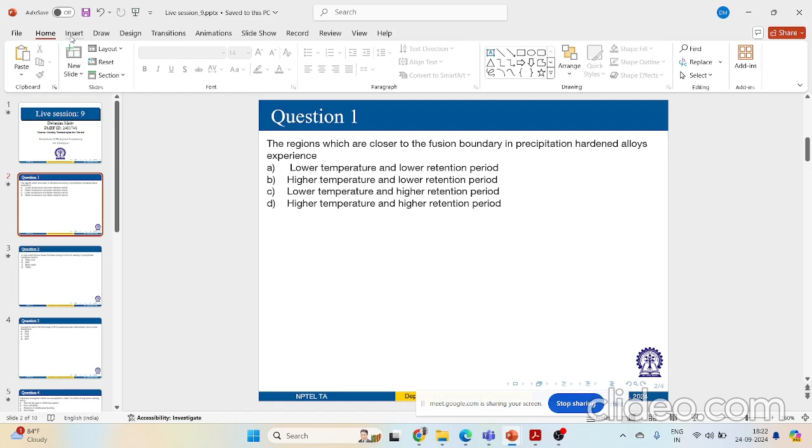As I was saying, metals can be strengthened in several ways, such as solution hardening, work hardening, precipitation hardening, and transformation hardening. Now, the effectiveness of these hardening mechanisms can be significantly reduced with heating during welding in the heat affected zone. My tablet is not working today, so we will use presentation mode only for whatever I write down.

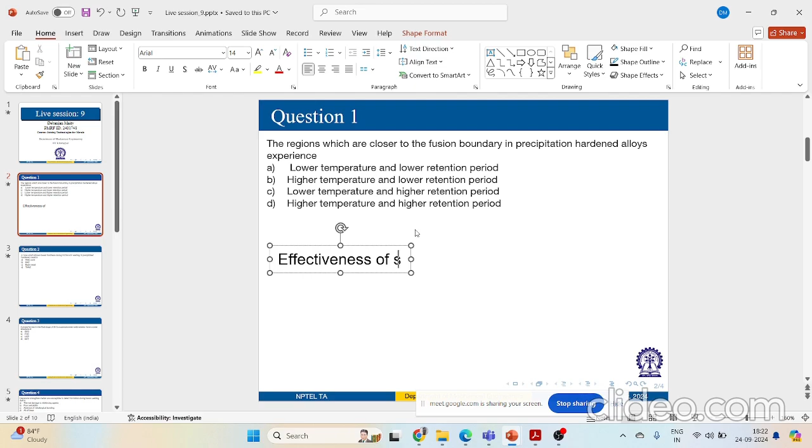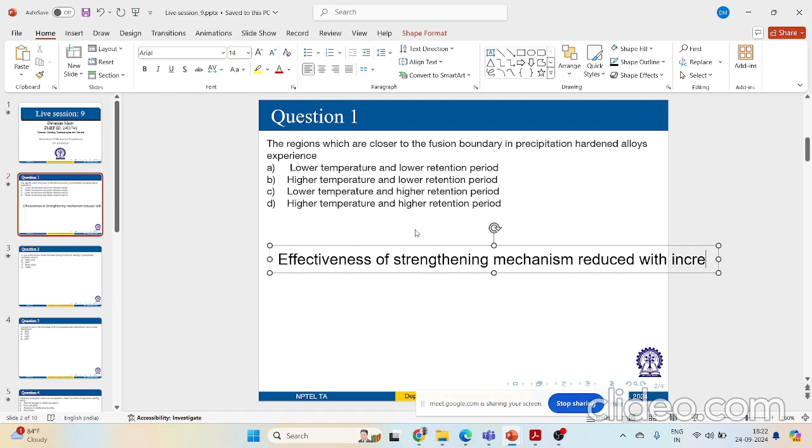So what I was saying is the effectiveness of strengthening mechanisms reduces with increase in temperature. That is a very well known thing.

Now the peak temperature in the heat affected zone is too low to cause melting. You cannot observe melting in the heat affected zone, since the heat affected zone is the zone beside the fusion zone.

However, the temperature is high enough to cause change in the microstructure as well as the property of the material. So if you see, when a metal is cold worked without any thermal effect, and is plastically deformed—for instance, by cold rolling or extrusion—what happens in terms of metallurgical aspects?

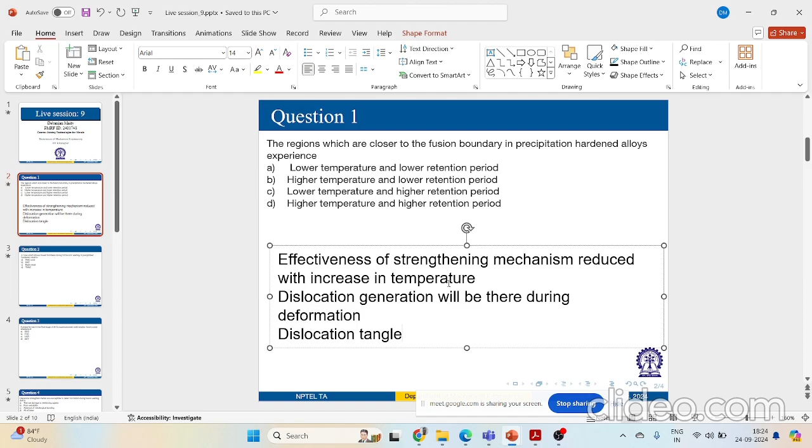There will be dislocation generation during any kind of deformation process. Now these dislocations can interact with each other, and if they interact, they form some kind of tangle—we call it dislocation tangle. Such dislocation tangles hinder the movement of newly generated dislocations.

In this way, the metal is strengthened or hardened by cold work. There will be lots of dislocations, they interact with each other, and due to this interaction they hinder the movement of newly generated dislocations, hardening the metal. This is called work hardening.

Now most of the energy expended in work hardening appears in the form of heat only. However, if you look at the microstructure, a finite fraction of energy is stored in the material as strain energy. This stored strain energy is the driving force for recrystallization.

Whenever recrystallization occurs, this stored energy is released. So the strain energy that gets stored is only released during the process called recrystallization, and this energy is released as fresh and strain-free grains. So recrystallization is when strain-free grains form.

Now, this work hardened metal, I was telling that the strength of a work hardened metal tends to decrease with increase in annealing temperature and time. As simple as that.

Now, there is another procedure called recovery. So before recrystallization, some kind of process takes place, which I'm calling recovery. During that period of time, certain properties of work hardened material, for instance electrical resistivity, will tend to recover without causing any microstructural change. So you will not see any kind of change in your microstructure before recrystallization happens.

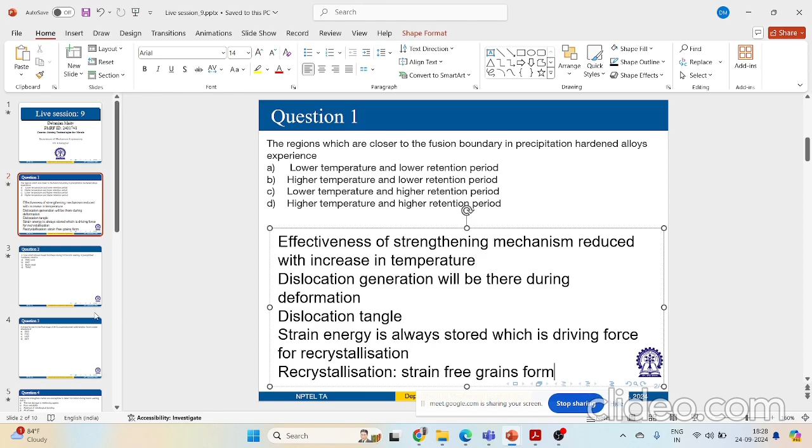And this is called recovery. So, surface energy. How does grain growth occur? So you will have your total grain boundary area, and there will be some surface energy, total surface energy associated with your system, right?

Now, the surface energy will reduce if your grain size is getting increased. So with coarsening of grains, my surface energy will be getting reduced, right?

So it is something like this. Let's say this is my x-axis, duration of annealing, the annealing time. And this is annealing temperature on the y-axis.

Now, if you are increasing your temperature as well as time, you will be increasing your grain size, right? So something like this, I am increasing my grain size towards this direction. As I go upward, this is my grain size D1, this is grain size D2, the grain diameter I'm talking about, this is grain diameter D3 and D4, and so on.

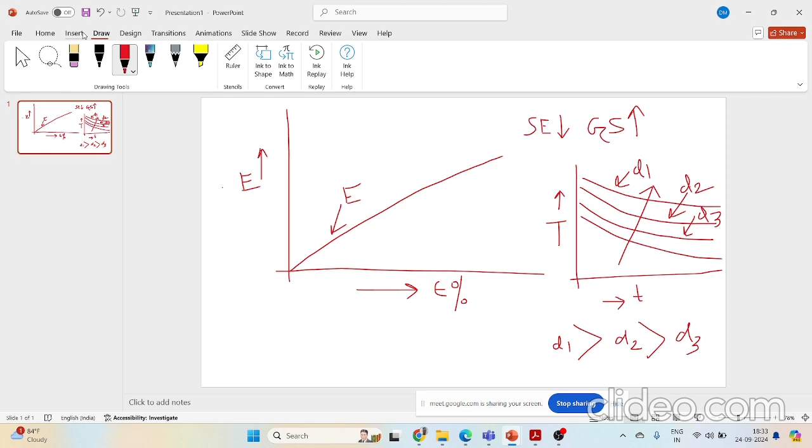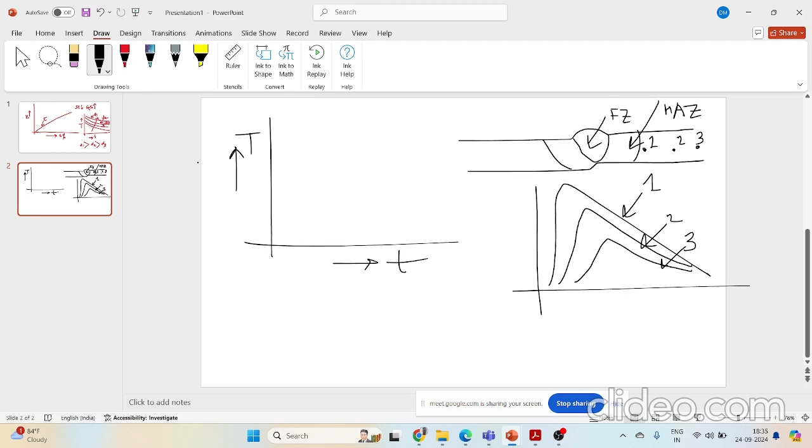Now if you see, is there an eraser? This is the eraser. So this is my time and temperature plot. Now if you see the strength or hardness of a metal in these three different regions, how will it vary?

So this is my distance from the weld center, okay, and this is my sigma, denoting strength or hardness. So the loss of strength will be highest for location 1, which is experiencing the maximum temperature.

If you plot this variation in strength, this will be the lowest one at location 1, then location 2, and as I go towards the base metal zone, that will be the unaffected zone. So this is 2, and this will be my location 3, correct?

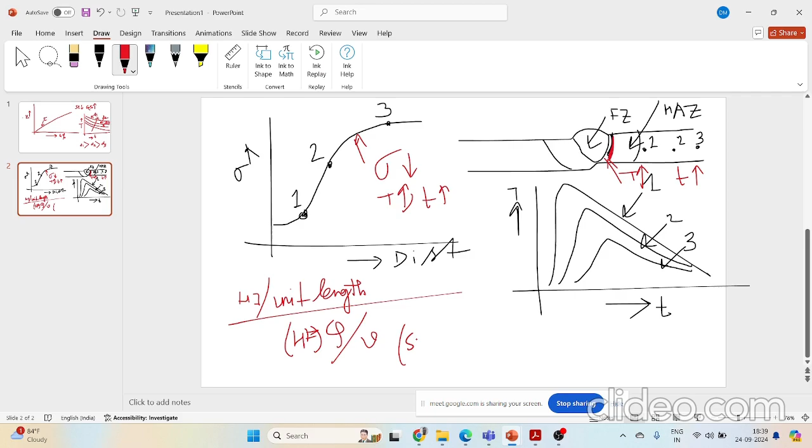Heat input per unit length, I'll denote this as Q by V. Q is my heat input, and this is my welding speed. The ratio of total heat input to the welding speed is known as heat input per unit length.

So as you increase your heat input per unit length, the size of the heat affected zone increases, and the retention time above the effective recrystallization temperature increases. Consequently, there will be loss of strength in your heat affected zone, and this effect becomes more severe as the heat input per unit length is increased.

Now if I want to plot this grain size, how will it vary? This is my distance on the x-axis, and let's say this is my grain diameter or grain size. Which location will experience the maximum grain size? The location which is experiencing more temperature and time above the recrystallization temperature. So my location 1 will experience the highest grain size compared to location 2 and location 3. As you approach the base metal region, you end up with a much finer, unaffected region. As you increase time and temperature, you enhance something called grain coarsening.

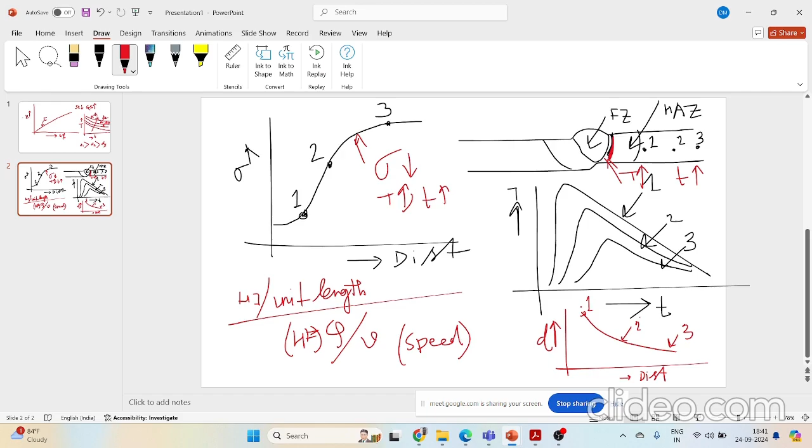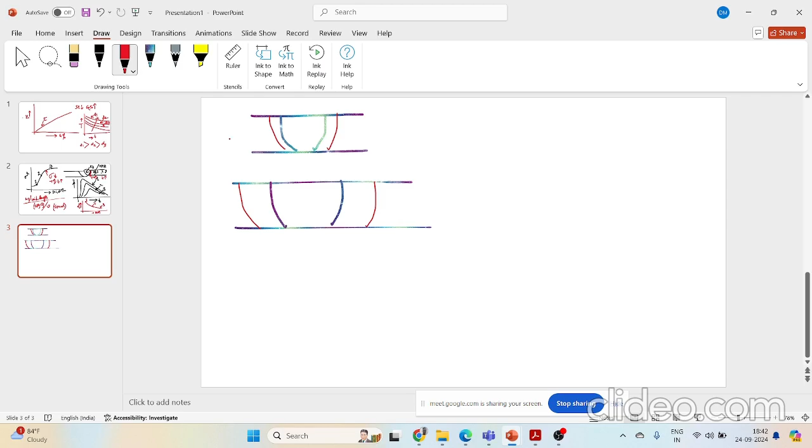I was talking about this heat input per unit length. Let's say this is my fusion zone and this is my heat affected zone, for one condition. For another condition, this is my fusion zone and this is my heat affected zone. For the next one, this is my fusion zone, this is my heat affected zone. And let's say this is the center line.

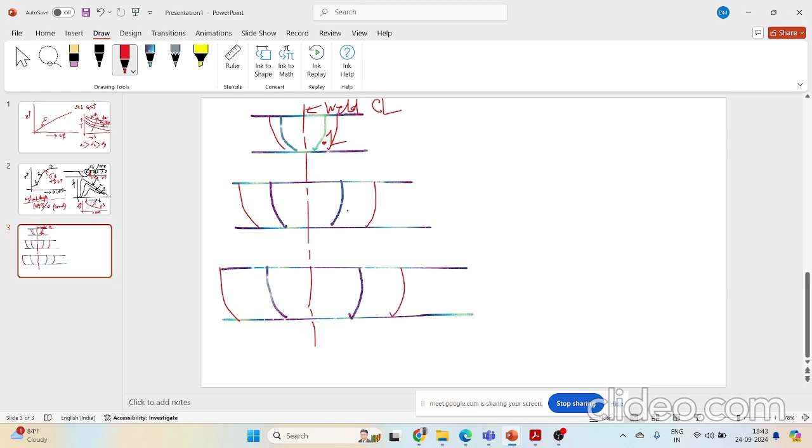This is my weld center line. Now this is location 1 in the heat affected zone, this is location 2, and this is location 3. As I am moving downwards, I am increasing my heat input per unit length, Q by V is getting increased. And as I was saying, as you increase your Q by V, the ratio of total heat input to the welding speed, the size of the heat affected zone will increase.

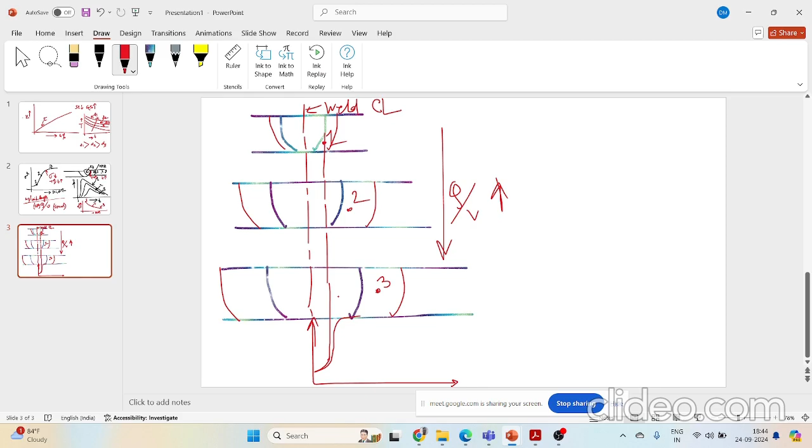So how will my strength vary then? Let's plot my strength at location 1, location 2, and location 3. This is location 1, this is for location 2, and this is for location 3. This is strength. This is what we are talking about. Any question?

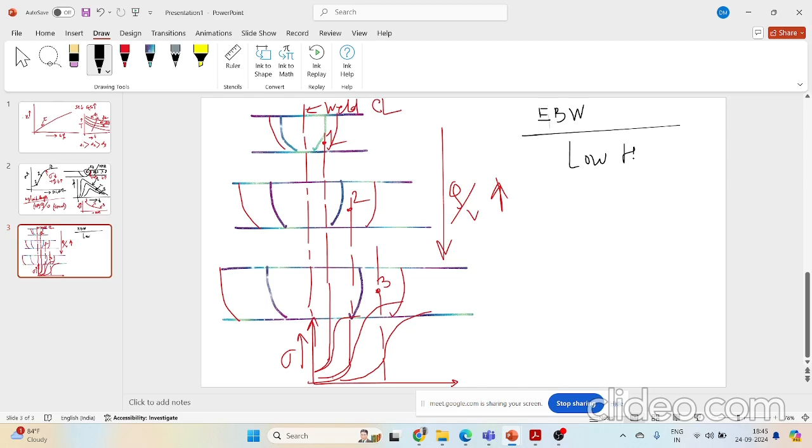Now, can you tell me, in electron beam welding, will you see more or less recrystallization? What happens in electron beam welding? It offers low heat input and a higher cooling rate. Cooling rate is very high in electron beam welding, so very little recrystallization is observed in the heat affected zone of your work hardened material.

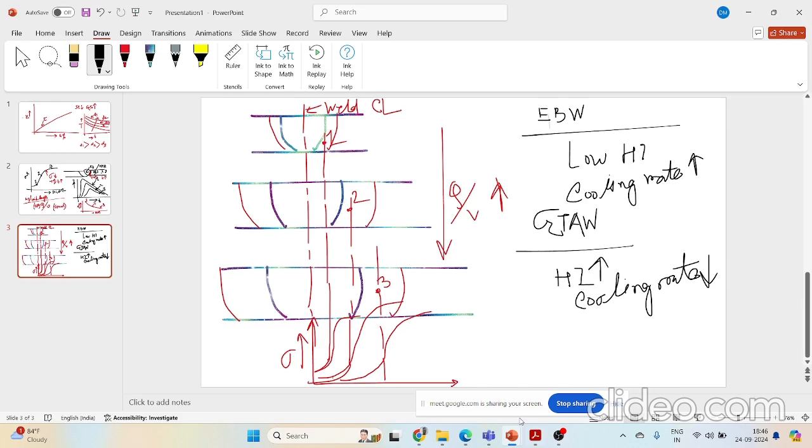On the other hand, consider gas tungsten arc welding. How can you characterize this process? There you will have higher heat input and lower cooling rate. Because of that, you get time for diffusion to happen. Recrystallization and even some grain growth will be observed in your heat affected zone. So I will come back to my original presentation. We have talked about this recrystallization, work hardening, and grain growth.

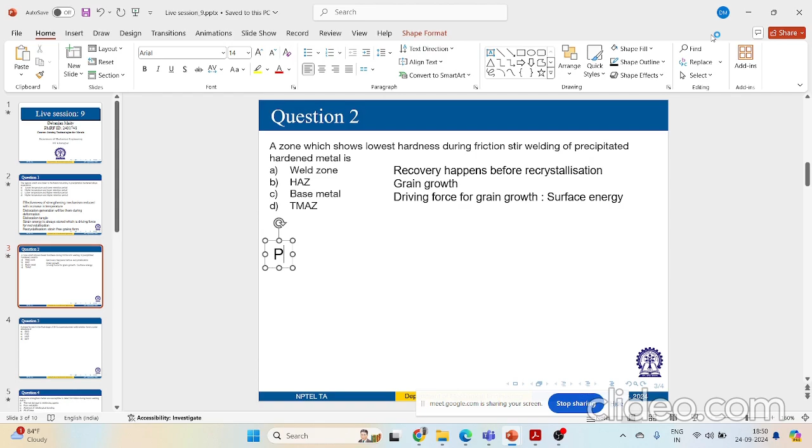So what we will do next, we'll talk about precipitation hardening. Okay, so we'll talk about precipitation hardening.

If you are thinking of precipitation hardened metals, aluminum alloys are the most frequently welded metals which can be strengthened by this precipitation hardening. In general, high strength aluminum alloys are more susceptible to hot cracking, and loss of strength or ductility in the heat affected zone.

Now, let us discuss a little on the background of precipitation hardening. We have probably talked about the mechanism of precipitation hardening before - how does it work? Let us talk about it again. So, aluminum and copper alloy, Al-Cu alloy, Al2Cu. Sorry, my recording got interrupted in between, but fine.

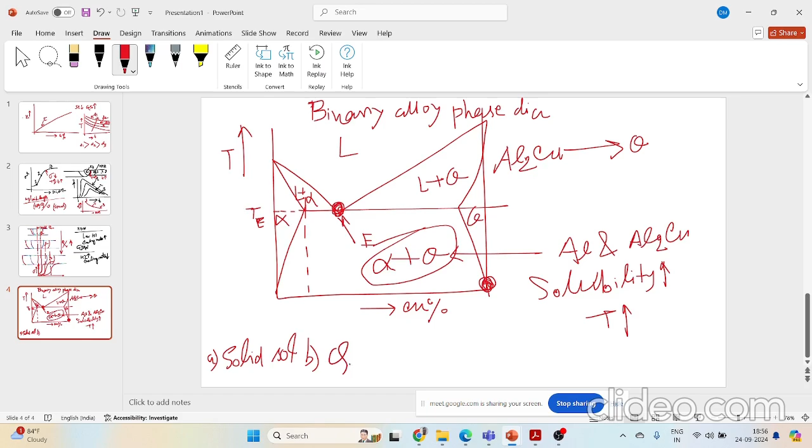After that I will do quenching. Once I have formed this solid solution, I will do quenching to rapidly cool the solid solution to room temperature. When I do this quenching operation, this rapid cooling, what will it do? It will supersaturate the solution - my solution will be supersaturated in copper, so the concentration of copper will be much higher than it should be.

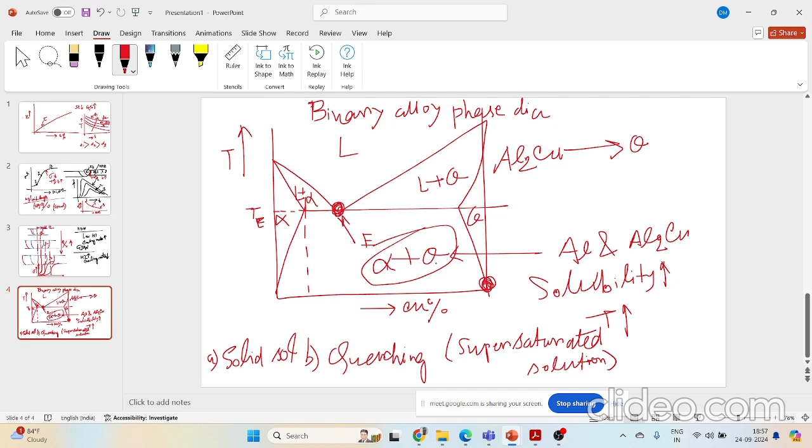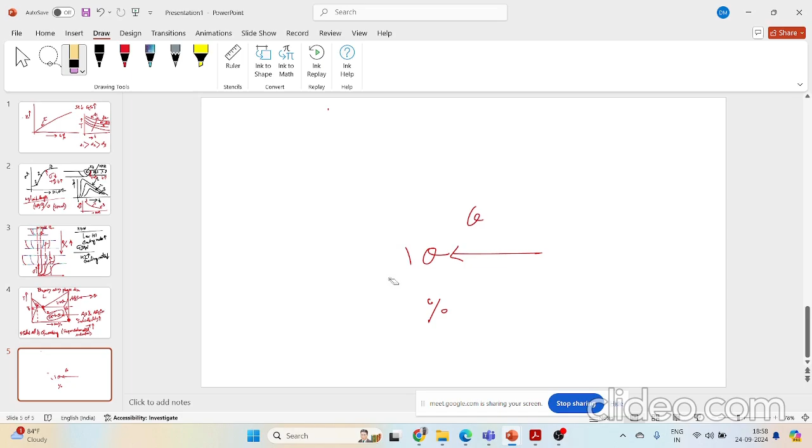So this will form a supersaturated solution. Meaning... for some reason this recording is not working properly. Okay. So I have made this supersaturated solution. What will my next step be? My next step will be the aging process.

I'll be doing aging by heating at some intermediary temperature, let's say 190 degrees, which is called artificial aging. If you're not heating the alloy material, then it is called natural aging. So there are two different aging heat treatments: one is natural aging, one is artificial aging.

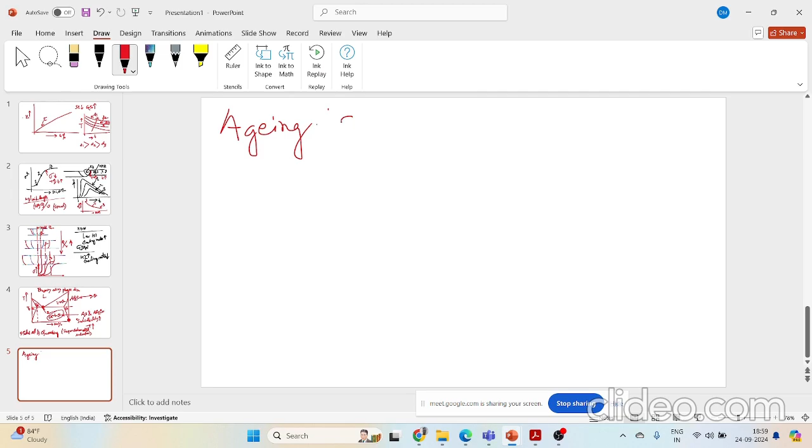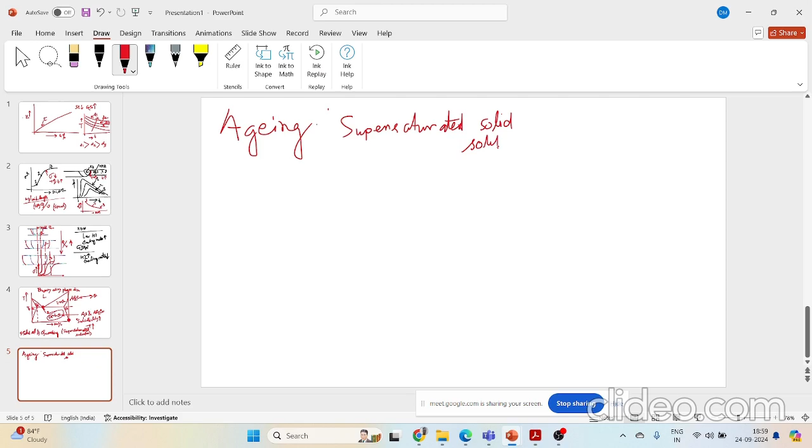There will be five sequential structures identified during this artificial aging of aluminum-copper. What are those? Initially I will be starting with the supersaturated solid solution, and then I will be forming the GP zone. After that, there will be formation of theta double-dash, then theta dash, then the theta phase.

What are these? So theta is the equilibrium phase. What kind of structure does it have? This Al2Cu phase has a BCT structure - body centered tetragonal. Remember that.

Now, the GP zones are sometimes called GP1 also. The theta double-dash phase is sometimes called GP2, and the theta dash phase - these three.

These three phases, they are metastable phases. They are not the phases that will form in equilibrium condition.

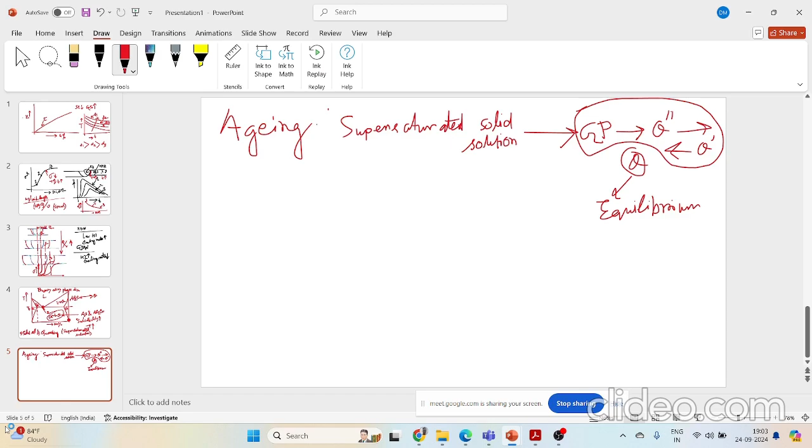This is my aging time, the unit of which can be in days. And this is, let's say, HV. What is HV? HV is Vickers hardness number. Correct?

Now, whatever I will be plotting has been found out from experimental observation. I'll be plotting two different temperatures of aging, one at 190, one at 130. There will be a difference observed in the hardness value for this GP region, theta double dash, theta regions, right?

So one is this, which had been aged at 190 degrees, where somewhere around an aging time of 10 days, formation of theta dash was there, and towards the end I'll be forming this equilibrium phase.

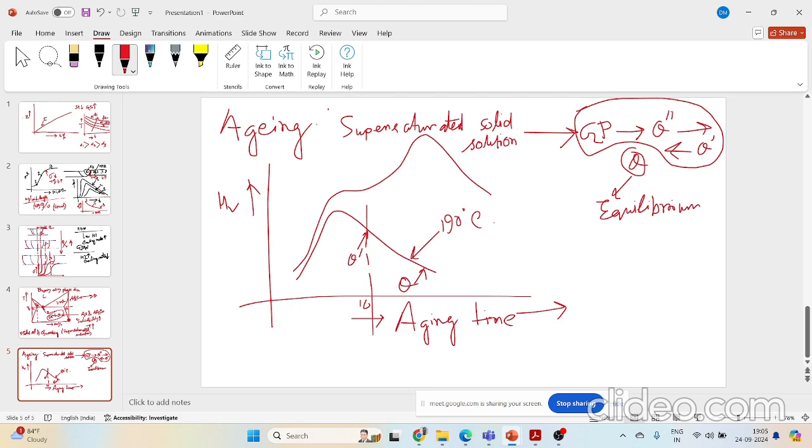And another temperature region is lower than this, done at 130 degrees, so that will observe characteristics like this. This is my GP1 region, and over here this is my GP2 region. Subsequently, it will be forming the equilibrium phase. Correct? Any question?

I will show you another graph. What I will show there is the precipitation hardening curves of this aluminum alloy. This again has been experimentally observed. The alloy was naturally aged at room temperature before heat treating.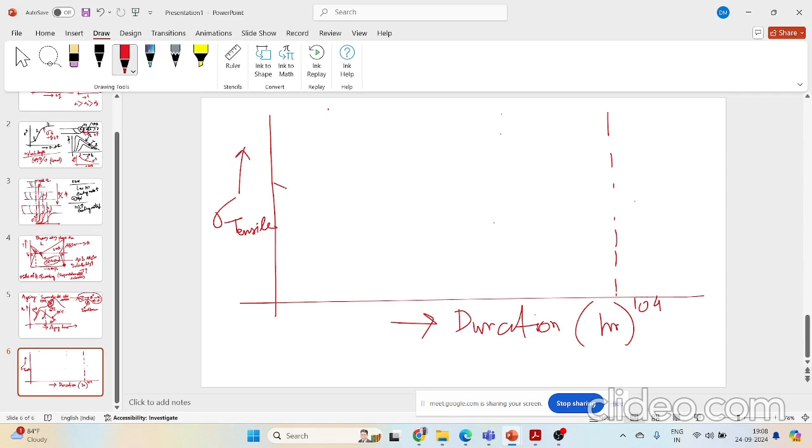So with increase in duration, the lowest one will be at highest temperature. This was aged at 260 degrees C.

And as you will be decreasing your temperature, it will be varying something like this. This was somewhere around 230. This was somewhere around 205. This was somewhere around 170, and so on.

So what you will be seeing: the alloy had been naturally aged at room temperature before heat treatment, and the initial strength decreases due to dissolution of GP zones formed in natural aging. Higher the temperature, the faster overaging will occur and the strength decreases. So higher the temperature.

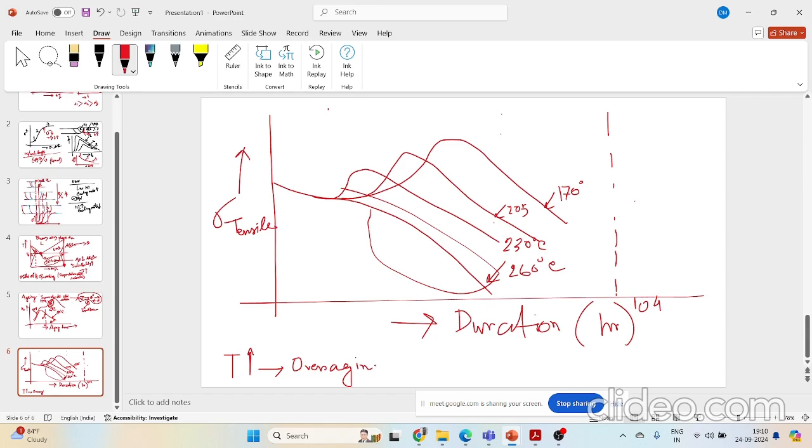Higher the temperature, faster will be overaging, and strength decreases.

Now, how will we characterize this heat affected zone of base metal that will be strengthened by precipitation hardening? How will we be characterizing that? To understand the heat affected zone characteristics of precipitation hardened metals, we need to be aware of the stability of those precipitates, which will be associated with the metal as a function of temperature. The stability of those precipitates is very important to understand the characteristics of the heat affected zone.

Now, the strengthening precipitates get destabilized or dissolved in the matrix above a certain critical temperature, depending upon the composition. Those will be dissolved with increase in temperature. There will be a certain temperature above which you will see no precipitation formed, so there will be this reversion or dissolution of those precipitates. Now, formation and dissolution of those precipitates always affect the hardness and strength of your metal during welding.

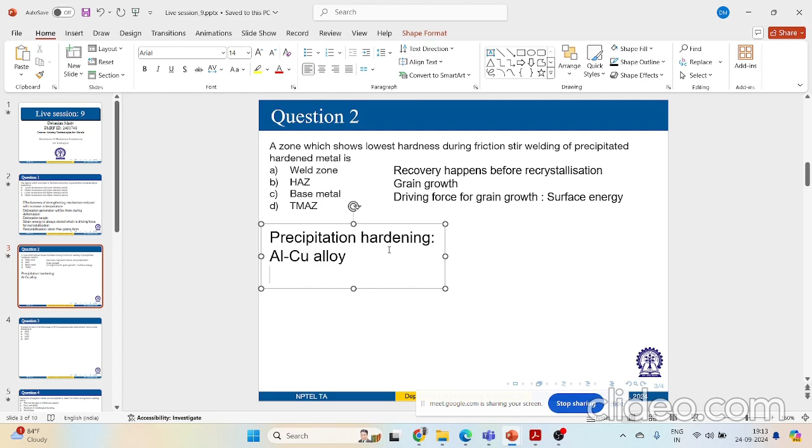So there are different precipitation strengthened base metals. If you see this aluminum series, there is this AA 2000 series, so we denote it something like this - aluminum 2000 series, aluminum 6000 series, aluminum 7000 series.

These are some of the precipitation hardened metals, and they can be developed either by fusion welding or solid state joining process, if you are raising the temperature of your base metal high enough.

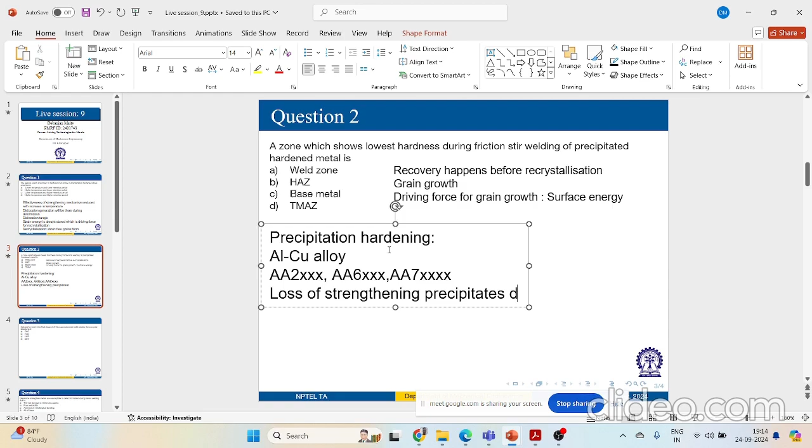Now, over here, the heat affected zone - the softening of your heat affected zone will occur due to two different processes. What are those? There will be loss of strengthening precipitates due to dissolution - this is one, I'll mention it as A. What is the other? The coarsening of grain precipitates.

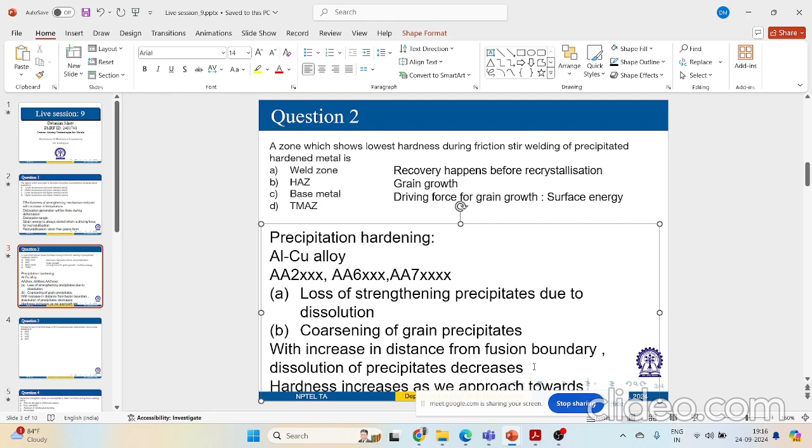With increase in distance from fusion boundary, what will happen? Dissolution of precipitate decreases, and hardness increases as we approach towards base metal.

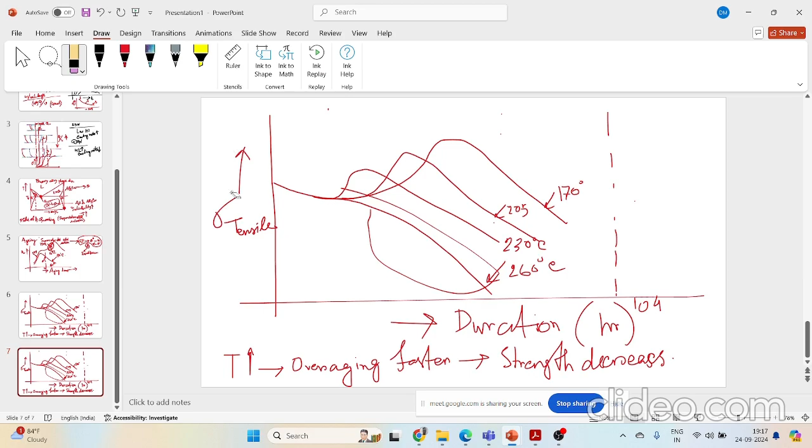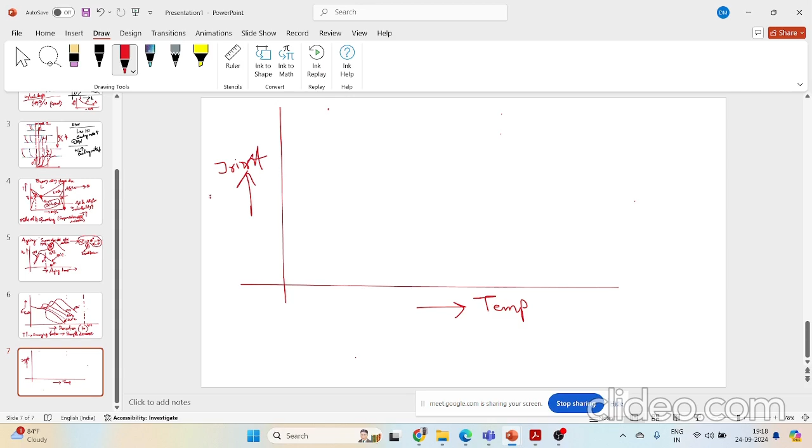So if we try to plot this effect of heating temperature - this will be my heating temperature, my temperature on the X-axis. And let's say this is my joint characteristics.

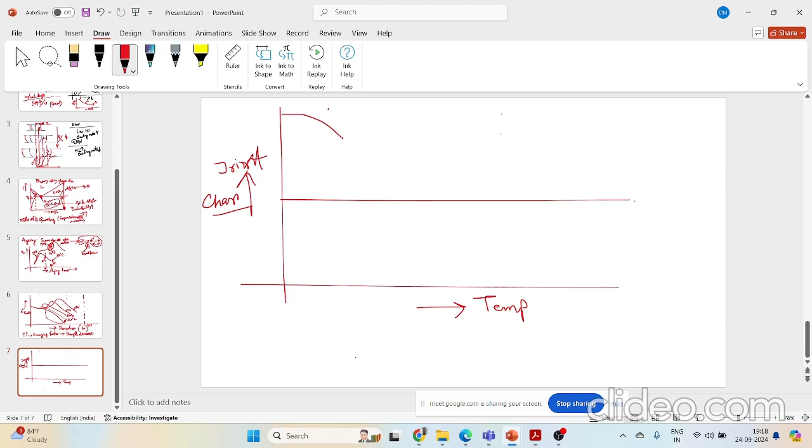So I'll be plotting two different graphs. One is residual stress - my residual stress will be getting reduced with increase in temperature. This is for residual stress.

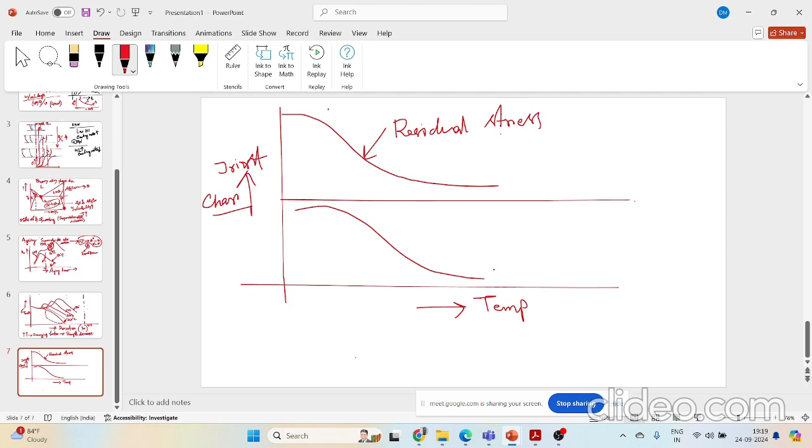What about the strength? Whenever you will be doing this recrystallization, my strength will get decreased. With increase in temperature, my hardness will get decreased and I will be increasing the ductility. So this is ductility.

So the zone which will be close to your fusion boundary or weld nugget, that will be experiencing higher temperature for longer time, and that will cause more severe reversion and grain growth. And as you go away from this fusion boundary in the heat affected zone, both the peak temperature and the high temperature retention period will decrease, causing lesser and lesser reversion and grain growth, leading to gradually increasing hardness of the heat affected zone as you go away from your fusion boundary.

Now if you have some combination of decrease in reversion, so you have increased availability of hardening precipitates, and as well you have somehow ended up with finer grains and precipitates in the heat affected zone - what that will do is increase my hardness at the location away from your fusion boundary.

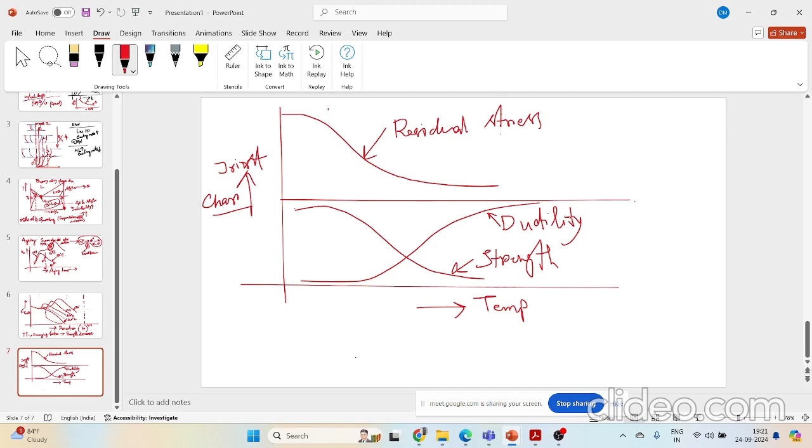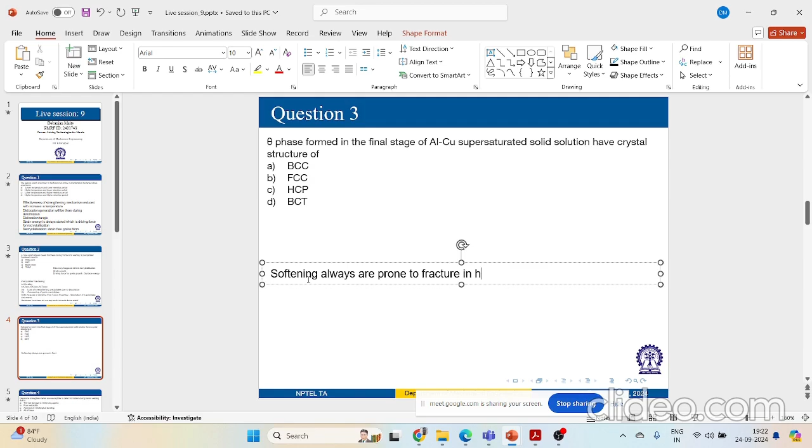So softening in heat affected zone always makes it prone to fracture. Softening always is prone to fracture in the heat affected region.

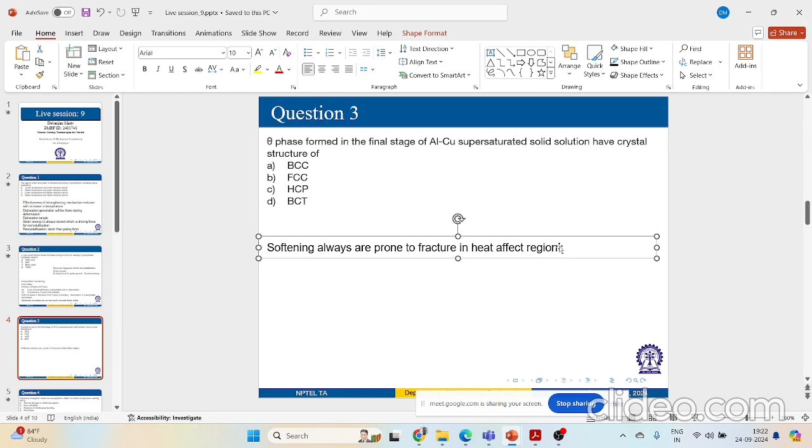And finally, we will be discussing the heat affected zone of transformation hardened metal, and how it will vary my weldability of the structure. But before that, let us try to solve a few questions first, and then we'll move to transformation hardened metals.

So my first question asks: the regions which are closer to the fusion boundary in a precipitation hardened alloy will experience what? This is the fusion boundary, and this is the heat affected region. As you move closer to your fusion boundary, will you have lower temperature lower retention period, higher temperature higher retention period, higher temperature lower retention period, or lower temperature higher retention period? More towards the fusion boundary, we will have higher temperature and higher retention period. Retention period means the time for which it is staying above some critical temperature - if you're thinking of recrystallization temperature, the retention period above that temperature will be higher.

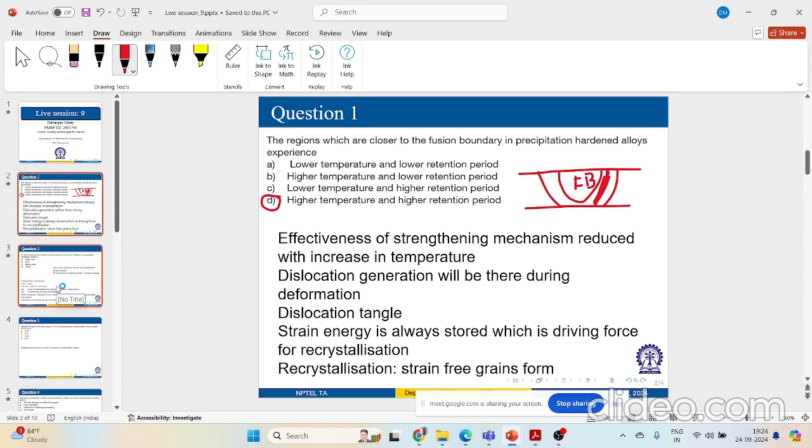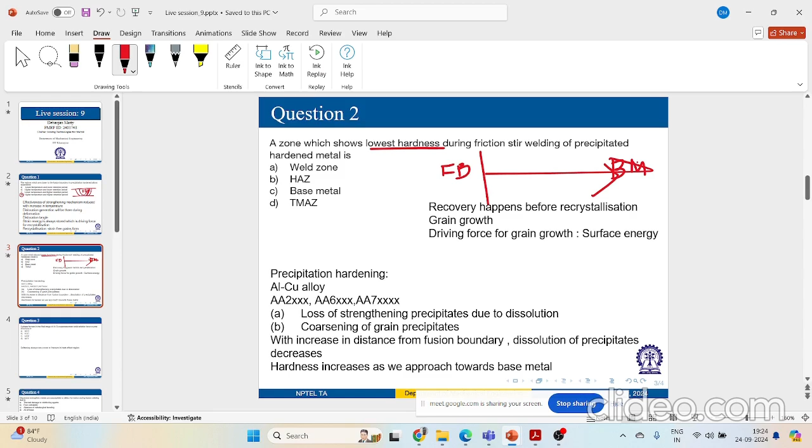Next question asks: a zone which shows lowest hardness during friction stir welding of precipitate hardened metal is - which one will be lowest hardness? As you move away from the fusion boundary - let's say this is my fusion boundary and this is my base metal - my strength will be highest as I move away, and I'm sacrificing strength and hardness in regions near the fusion boundary. So which zone shows lowest hardness during friction stir welding? This mechanism is similar for friction stir welding and fusion welding, because it depends on your thermal cycle - what temperature your metal is experiencing. So the weld zone will have the lowest hardness during friction stir welding of precipitate hardened metal, and as you move away from the weld zone, that hardness will increase.

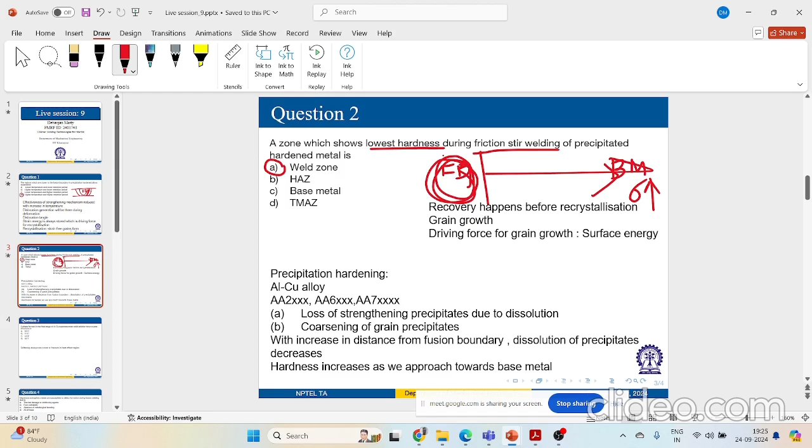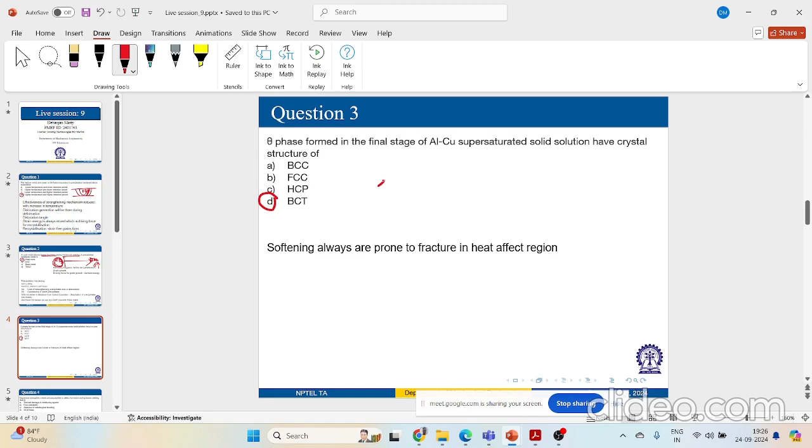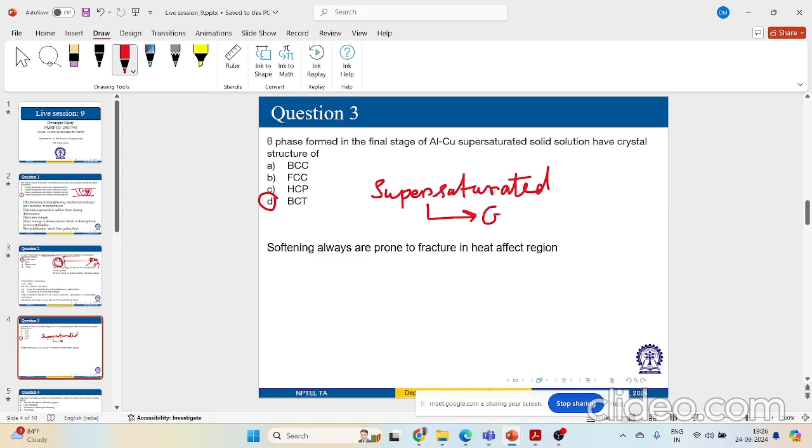Next, we talked about precipitation hardening of aluminum alloy. The theta phase formed in the final stage of aluminum copper supersaturated solution will have a BCT crystal structure. From the supersaturated solid solution, you form GP zone, then theta double dash, then theta dash, and finally theta, which is your equilibrium phase with BCT structure. The other crystal lattice structures can be coherent or semi-coherent with the structure for this solid solution.

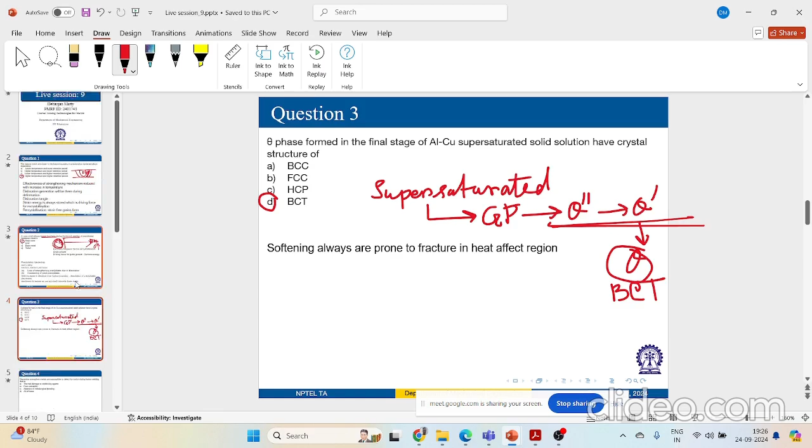Next, dispersion strengthening. Any idea what is dispersion strengthening? This is also a strengthening mechanism that enhances the mechanical properties of materials.

It involves the distribution of fine stable particles, which can be oxides or other compounds, in a matrix material to form a metal matrix composite. These particles hinder the movement of dislocations, which are basically defects. So if you are hindering the movement of dislocations as you progress with deformation, that will strengthen the metal.

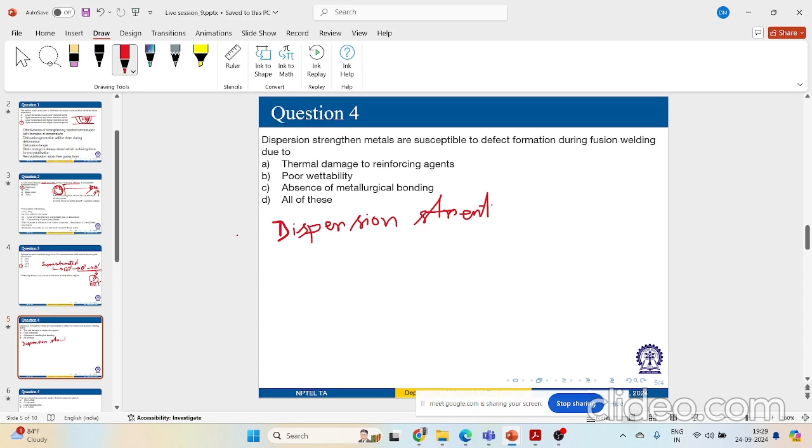So fine particles, dispersion strengthening - I will be having fine particles distributed uniformly. Those will be creating obstacles to dislocation movement, which will increase my strength and hardness. As simple as that.

Now, common materials that can be dispersion strengthened include aluminum, titanium, and some steel materials like stainless steel. People have done metal matrix composites, and these particles are called dispersoids. So Al2O3, aluminum oxide, can be a particle, silicon carbide a particle. Mostly oxides and carbides are used as this distribution of particles.

They are particularly useful in high temperature applications where materials must maintain their strength under extreme conditions. How can they form? We can form it through powder metallurgy, friction stir processing - these solid state kind of techniques for dispersion strengthening.

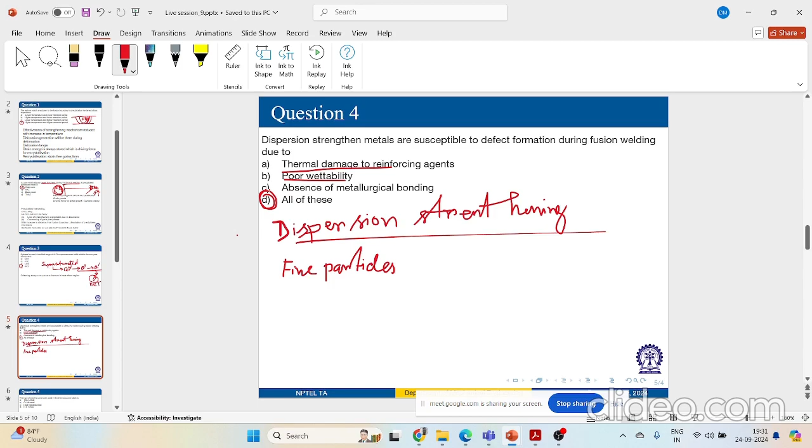There can be change in wettability also, and the viscosity of the melt will be changing - it will increase. So it may happen there will be poor wettability also. So all of this is the correct option here.

The type of steel commonly used in thermal power plants is chromium molybdenum steel - just remember that, I'm not going to explain it. So we are midway. Let us now move to transformation hardened metals.

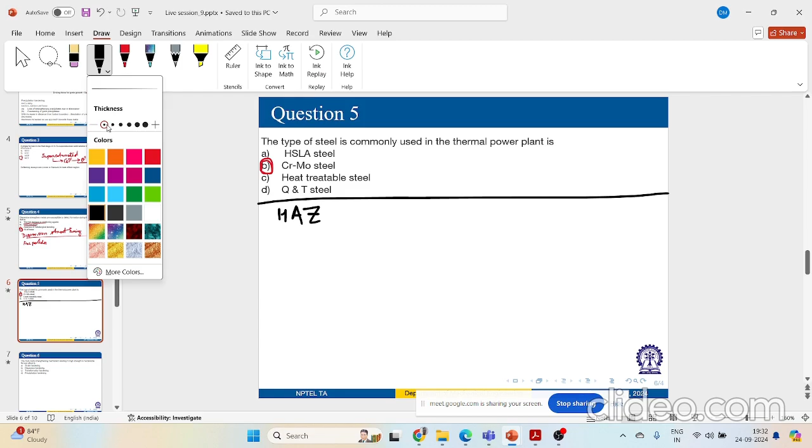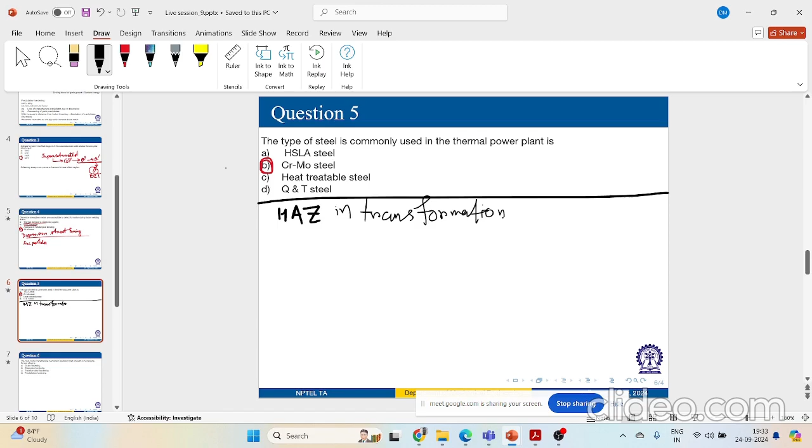Next we'll be talking about the heat affected zone, which involves transformation hardening. What are different transformation hardened metals? You can have steel, you can have cast iron - these will experience more complex changes than work hardening and precipitation hardening metals during welding. So there will be change in microstructure, change in properties in the heat affected zone of transformation hardened metals.

To understand this transformation hardening, understanding the iron carbon phase diagram and the CCT diagram, continuous cooling transformation diagram, is very important. I won't go into that direction, but those things will be fundamental to understand transformation hardening, because it is based on change in phase, change in microstructure - transformation of austenite into martensite, austenite into pearlite, formation of different phases.

If you see the weld thermal cycle imposed during welding versus during conventional heat treatment of steel, that is completely different. During welding, you are going beyond the melting temperature of steel, which is above 1500 degrees. While doing heat treatment, you don't go beyond the A1 or A3 upper critical temperature for austenite formation, which is somewhere around 900 degrees. So the weld thermal cycle experienced during welding and during heat treatment process is completely different.

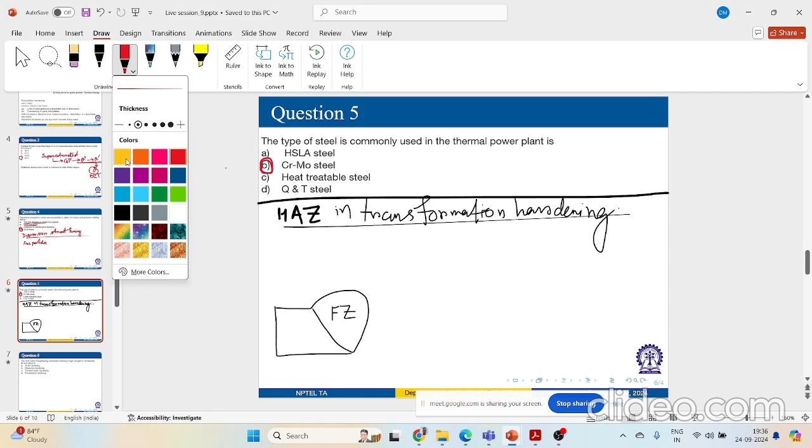Let's say this was my cross section. This was my fusion zone, correct? Then we will be having PMZ. What is PMZ? PMZ is partially melted zone.

Then you will be having coarse grained heat affected zone. Then you will be having fine grained heat affected zone.

Then you will be having recrystallization. And finally, you will be having this base metal. So I am having 5 distinct regions.

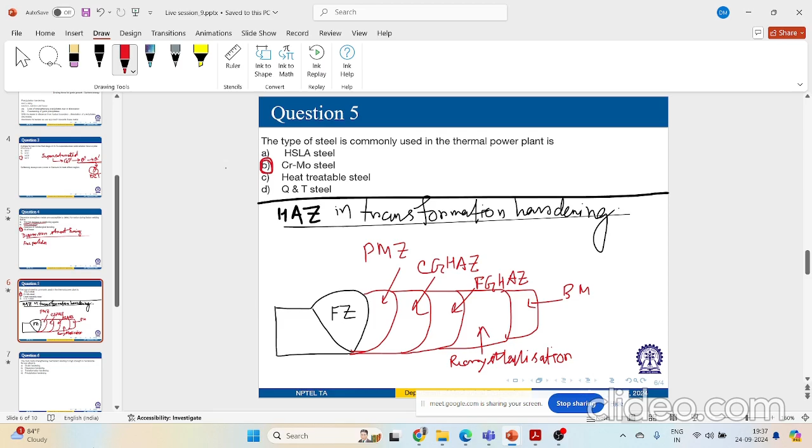So what will be the temperature, or the range of temperature, for these different regions? If you see the iron carbon phase diagram, let me try to draw this iron carbon phase diagram initially. What is this x-axis? This is carbon percentage, correct?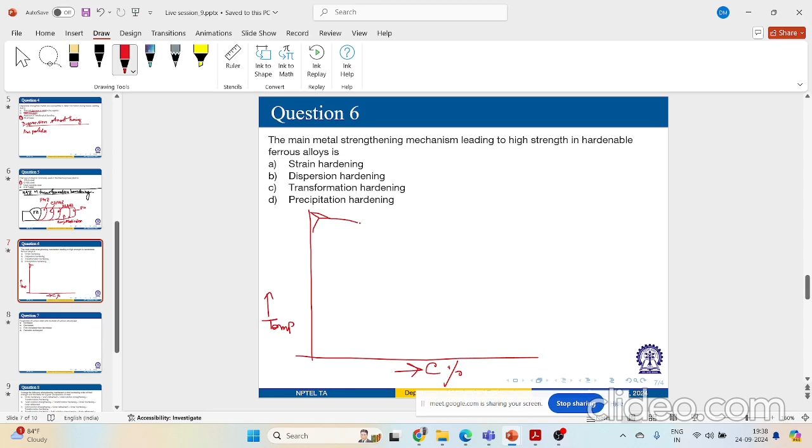And this is temperature. One is eutectic, one is eutectoid. I'm not explaining everything, I will just mention the main or critical phases. This is somewhere around 1600, somewhere around 1500 probably. And this is somewhere around 1500. This temperature is around 700, and the upper critical is 900, right?

And the dissolution can be somewhere around 300 or 400. Now, this temperature is 730. This temperature is around 1100.

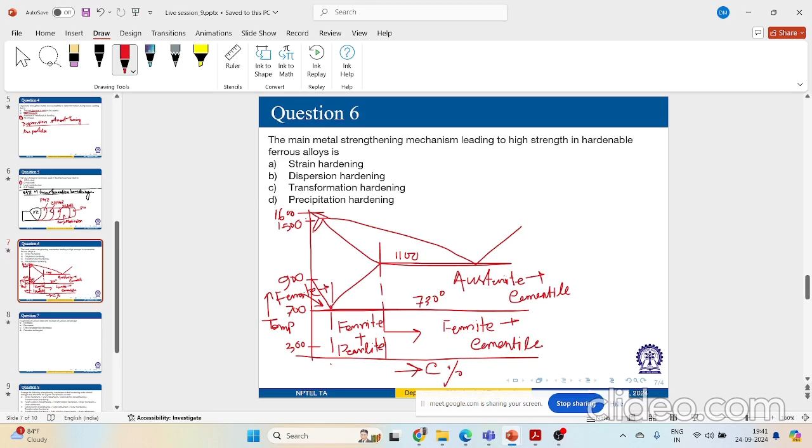Correct? What will form over here? Over here, it will form austenite. This is all liquid. This is liquid plus cementite. And this is liquid plus austenite. Correct?

Now, next to the fusion boundary, which has temperature between the liquidus and solidus, as you know, that will form a mushy zone. So the mushy zone consists of delta ferrite or austenite and the molten metal in this region. So this zone is called the partially melted zone.

So for the partially melted zone, the temperature range is somewhere around 1600 to 1400. For the partially melted zone, my temperature range is 1600 to 1400. Okay.

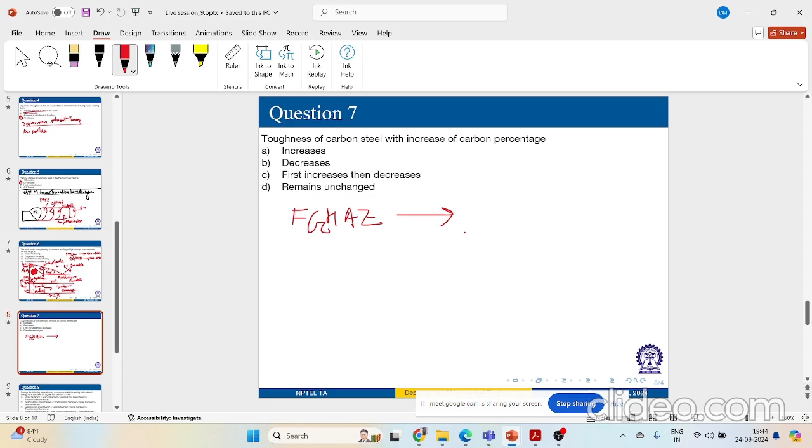And when will my recrystallization start? My recrystallization will start above 400, and that may continue till 600. So the recrystallized structure range is 400 to 600.

So the zone that experiences temperature between this subcritical temperature and recrystallization temperature, there my phase will remain unaffected, but recrystallization will take place.

Right? Now, if you are thinking with respect to retention period or soaking time, the high temperature retention period during welding in the heat affected zone is very short to develop a homogeneous solid solution of austenite through complete dissolution and phase transformation, especially in alloy steel having some stable phase compounds. So what will happen? A very inhomogeneous solid solution of austenite will form, along with other stable phases that will be forming in the heat affected zone. That will affect my transformation behavior of austenite.

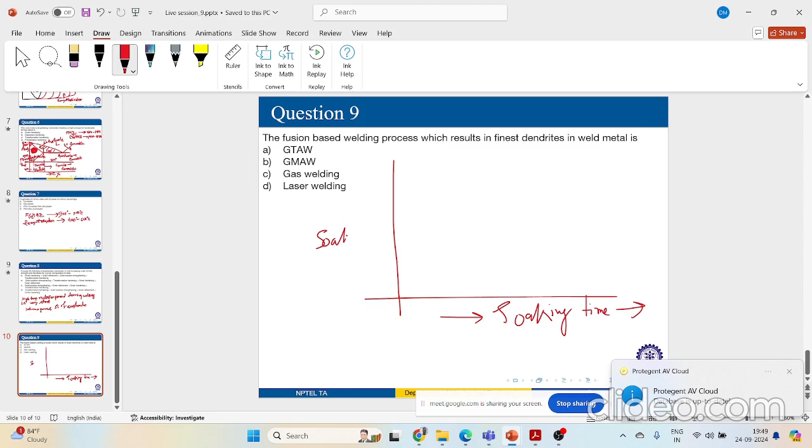So let me draw some schematic. This is my soaking time and this is my soaking temperature. So over here, this will be pearlite, ferrite, cementite, austenite, not austenite over here. So this is in the temperature range of 900 to 700 I'm talking about.

Now, as you are increasing your soaking time, I will be forming more austenite formation, ferrite formation, cementite formation. This is somewhere in the range of 1000, let's say. Now, as you go beyond 1000, let's say at temperature of 1200, and apply more time, I will be forming homogeneous austenite all over.

Now my cooling rate will also affect things, like peak temperature. The cooling rate experienced by the heat affected zone will be maximum at the fusion boundary, and then it keeps on decreasing gradually moving away from the fusion boundary towards the unaffected base metal. So this coarser austenite in the heat affected zone, which I mentioned as coarse grained heat affected zone,

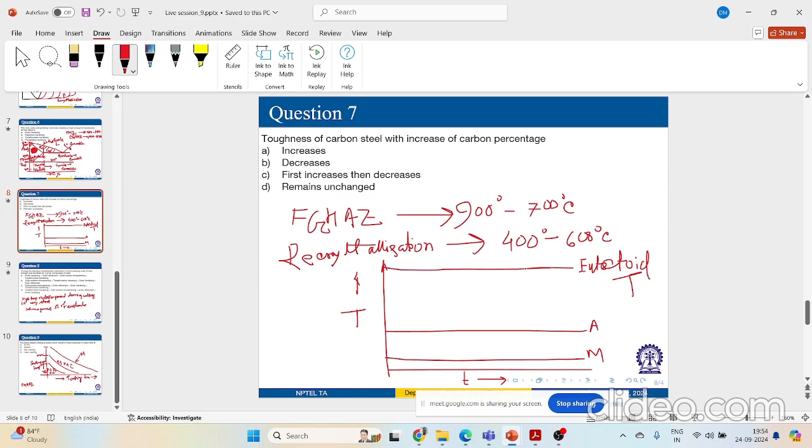Now there are different regions, to be particular. So this section over here will form austenite plus pearlite depending on your cooling rate. Now, if your cooling rate is much slower, something like this, it will form coarse pearlite. If your cooling rate is comparatively higher, like this, you will form fine pearlite.

Then with more increase in cooling rate, like this, over here you will form austenite plus pearlite, and over here, if you go to temperature below this martensite range, it can form pearlite plus martensite. It all depends on time and temperature for which my material is experiencing. And over here, if you don't cross this region, then this is much higher cooling rate, and that will directly convert my austenite structure to martensite, which is hard and brittle enough.

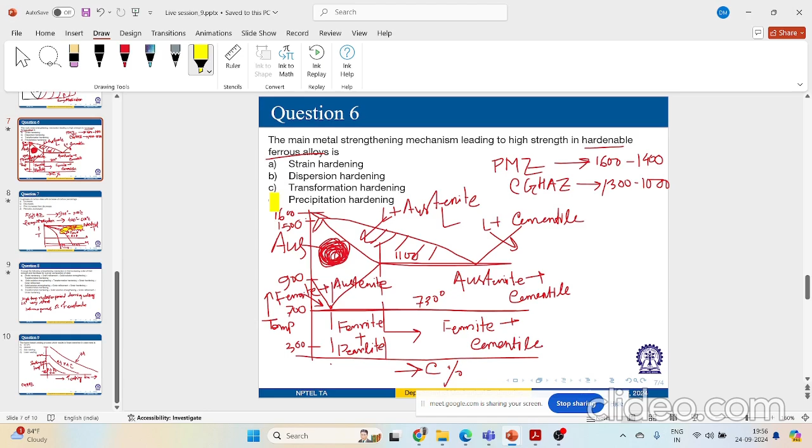Okay, so finally we'll just go through these questions. I believe that is enough explanation of different aspects of weldability of structures associated with precipitation hardened, work hardened, transformation hardened metals. Let's finish this session by going through the remaining questions. So the main metal strengthening mechanism which leads to high strength in hardenable ferrous alloys - whenever you talk about ferrous alloys, we talk about precipitation hardening.

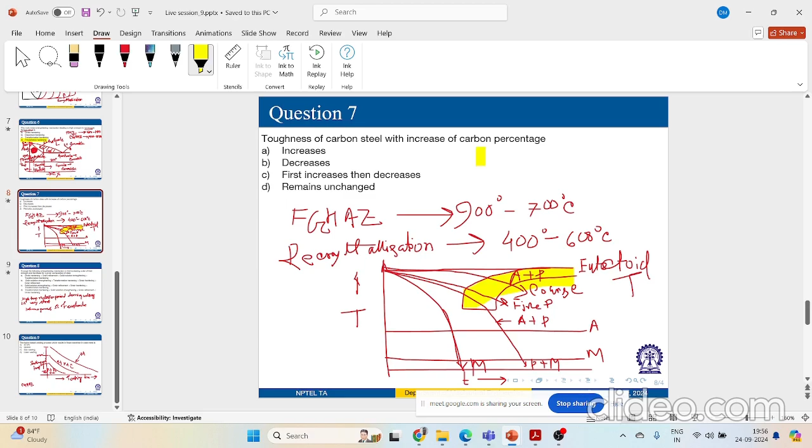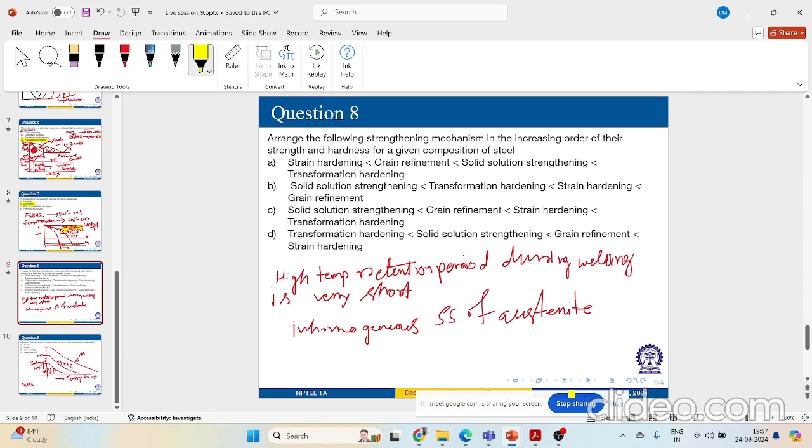Toughness of carbon steel with increase of carbon percentage - if you are increasing your carbon percentage, you will decrease your toughness. I have to arrange the following strengthening mechanisms in increasing order of their strength and hardness. So the maximum hardness will be for transformation hardening, then strain, then grain, then solid solution. So C is the correct option.

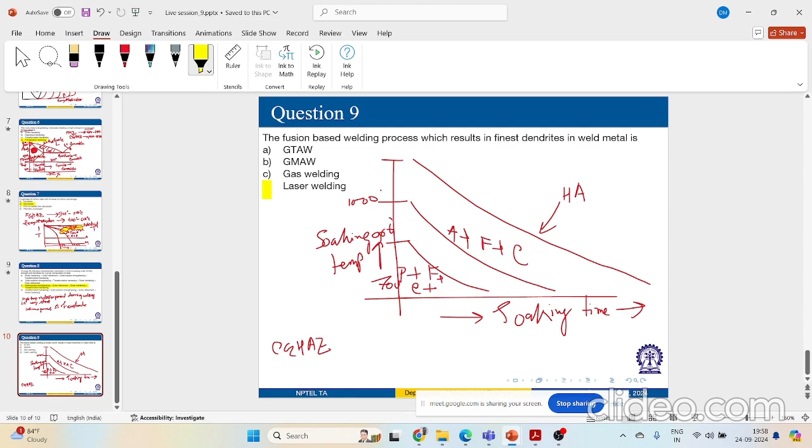And finally, the fusion based welding process which results in finest dendrites in weld metal - because gas tungsten, gas metal, gas welding will increase your heat input, cooling rate will also decrease, right? So they will not form fine dendrite formation, they will form coarse microstructure in comparison to laser welding. So laser welding will provide me the finest dendrites.